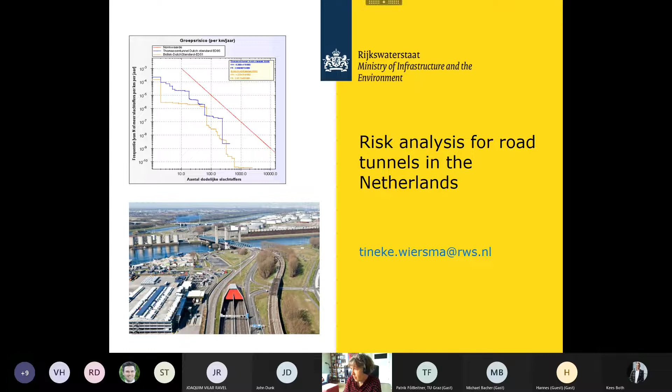Well, in my presentation, I will first explain a bit on how tunnel safety regulation is implemented in our legislation, and how the EU directive is also implemented in our national legislation. Then I will go into the risk analysis methods. Two methods are prescribed in our regulation. And then I will go into more detail into the quantitative risk analysis method. And since this is for PFPNet, I put also a short introduction on how we have fire protective measures in the model and how we can see if it influences the risks. At the end, maybe there will be some time for questions.

I can try to see the chat. No, it's not there. Okay.

Then first to the tunnel legislation in the Netherlands. As you may know, we have this EU directive of 2004 on the minimum safety requirements for tunnels in the Trans-European road network. This EU directive of 2004 was implemented in the Dutch legislation in 2006. Actually it's a bit more strict than even the EU directive, so we apply it to all our tunnels, not only the tunnels in the Trans-European road network. And it's mandatory for all tunnels longer than 250 meters.

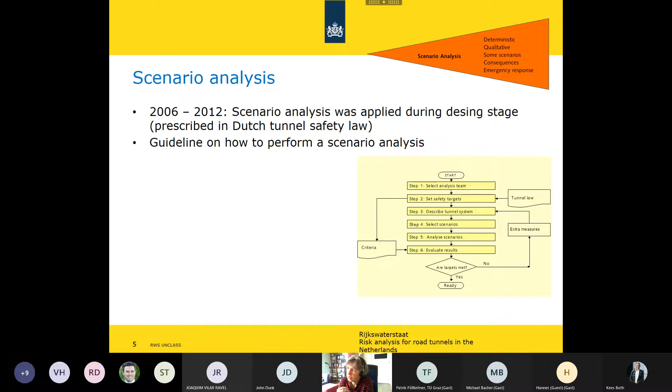So then we walk through the events during a scenario and what the response of the different organizations involved will be. And then at the end, we evaluate if we have all possible measures taken, and if there are, what recommendations we should follow in the preparation of the emergency response.

As I already mentioned, we had a lot of discussion on the acceptability of the risk and additional safety measures in the stage where we also applied it during the design stage. So we changed that, since we didn't have a risk criteria to compare it with, we changed that in the updated tunnel safety law.

And since we already prescribed all the safety measures in this new tunnel safety law, it was no longer useful to have this discussion during the scenario analysis. In the new scenario analysis, the focus is entirely on the preparation of emergency response procedures. So that's how we apply it currently in our new and refurbished tunnels.

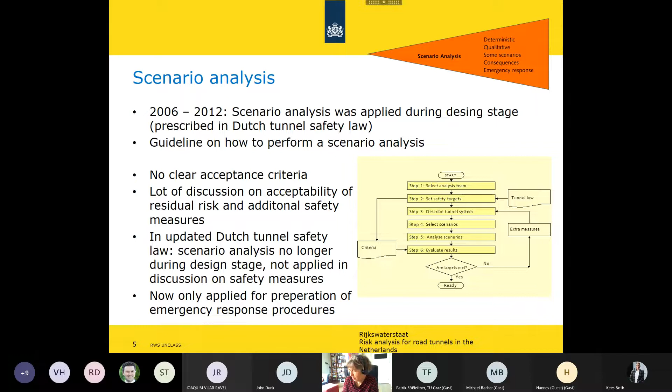The quantitative risk analysis, as contrary to the scenario analysis, analyzes a much larger set of scenarios, and we take into account the probability of these scenarios. We also quantify the consequences. We mainly use it to compare alternatives, and we apply it to see the effect of safety measures. But the main use now is to compare it with our risk criteria, which is also in the safety law.

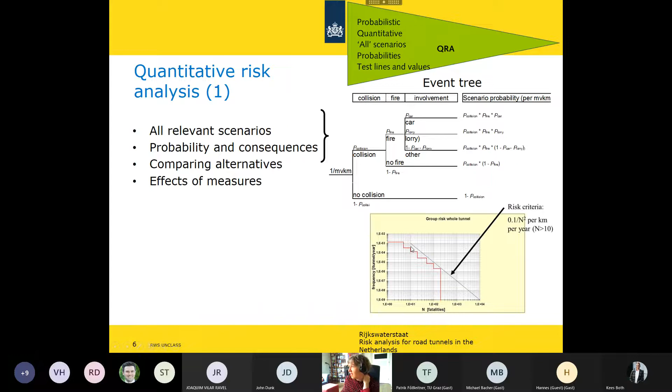So if you see this graph here, this is what we calculate. In this quantitative risk analysis method, we calculate the risk and display it in an FN curve, where we have the number of fatalities compared to the accident frequency, expressed per kilometer of tunnel per year.

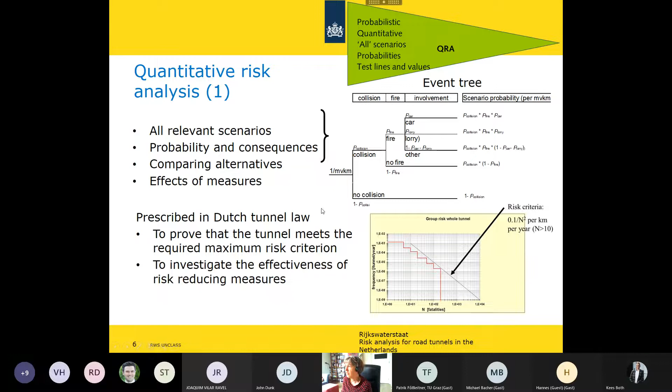This risk criteria is also prescribed in our tunnel safety law. After the calculation, which we have to do for every tunnel tube separately, it has to show that this risk line stays beneath the risk criterion. The model itself is a very large event tree describing all possible events and variations on the event, and the risk is a combination of the number of casualties for each event and the probability of that event.

We had this risk method earlier in 2006, but leading up to the updated tunnel safety regulation in 2012, we developed a dedicated risk model for quantitative risk assessment for road tunnels.

This development took several years, but when it was more or less finished in 2011, we also did a consequence analysis and acceptance tests for all our tunnels to see which tunnels would meet the criteria and which not, and how it compared to other risk models before we implemented it in the tunnel safety law.

We also made a comparison with the PIARC model of DG-QRAM. They are not really completely comparable, but it gives some insight into how they quantify these scenarios and which scenarios they had in the model compared to what we did. I think the RWS model has some more detail on the fire consequences and the influence on equipment.

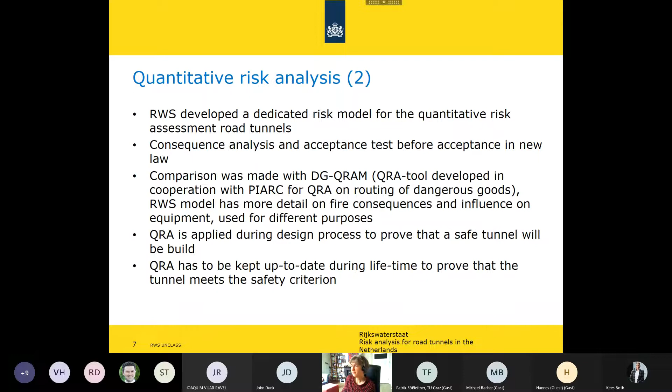The risk is highly influenced by the traffic intensity and the use made by, for instance, dangerous goods, so it can change over time. That's why we have to keep this QRA updated, and if you don't meet this risk criteria, then we have to take alternative measures to reduce the risk.

Well, in the model, the main - I hope you still see my screen, but I can see nothing. So, still okay? Yeah, screen is still good. Okay.

Then the main principles of the model. Of course, it's a model, so we have to simplify reality a bit, so wherever necessary we applied some simplifications. The quantification of the risk is mainly on lethality, so we don't calculate injuries or material damage.

We had some experiments in extending the model also to a material damage model, but since our risk criteria is mainly focused on lethality now, and all the measures on diminishing material damage are prescribed in our law, there's not much demand for a model on material damage, so we don't use that anymore.

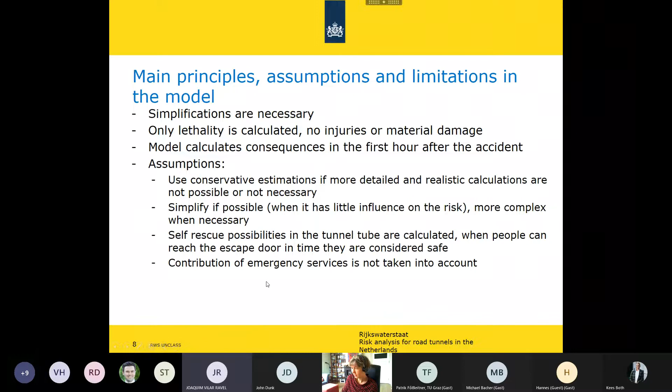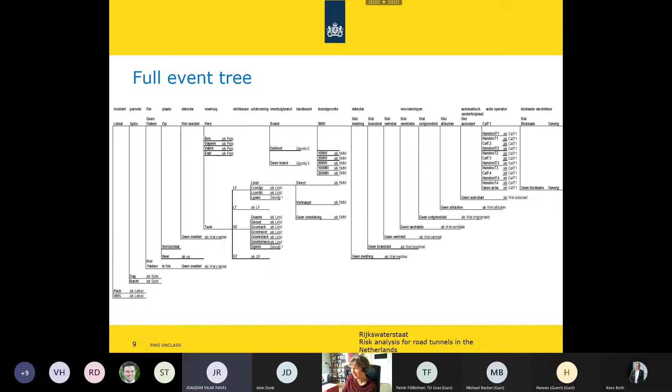First of all, we start with the type of incident, because it can influence the fire growth and the number of cars involved. So we start with: is it a collision or is it a breakdown?

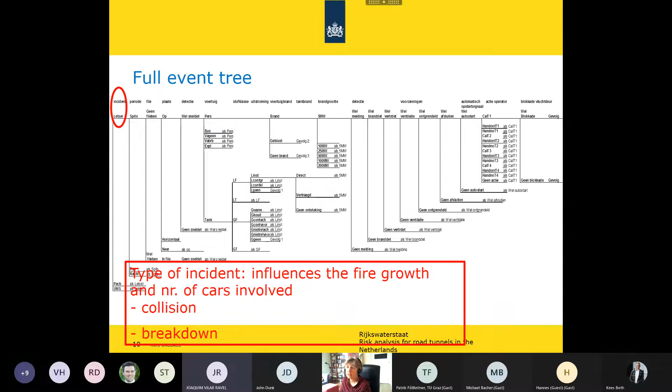Then the time of day is important, because in the evening or night there will not be many cars involved, but during peak hours the tunnel will be filled with cars when there's an accident. So that is incorporated in the model to quantify the consequences.

One important thing is also the number of traffic jams, especially traffic jams downstream of the accident. If we have a traffic jam already in the tunnel and one or more cars hit the tail of the traffic jam, it will influence all people in the tunnel. Since we have longitudinal ventilation in almost all our tunnels, the heat and smoke will go over this downstream traffic jam, so that will have major consequences.

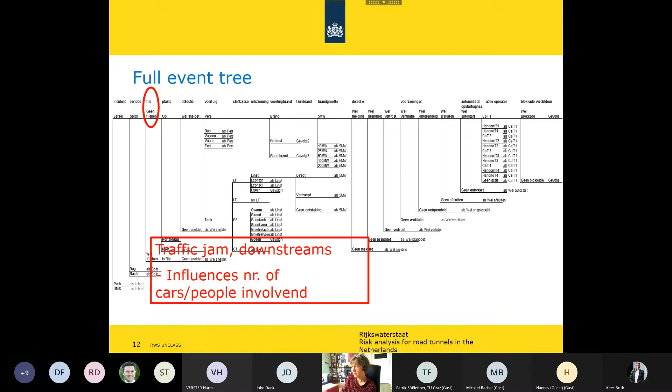In the model we also have the location in the tunnel. We have 3 different locations where we calculate consequences. The slope of the tunnel also influences how the spill of dangerous goods is distributed, so that's why we have 3 places in the model.

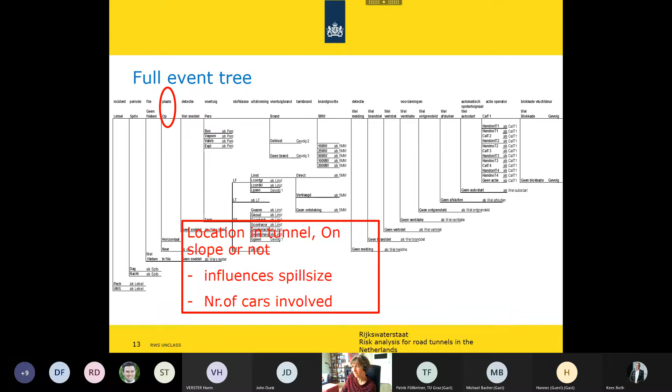We have a lot of detection equipment in most of our tunnels, and early detection can also help influence the consequences. If the operator, which we have in all our tunnels, detects the accident very early, it can start the tunnel equipment immediately, the ventilation and the evacuation, which will have a positive effect on the consequences. So we have fire detection, but we also have speed detection in most of our tunnels, so it's also in our model.

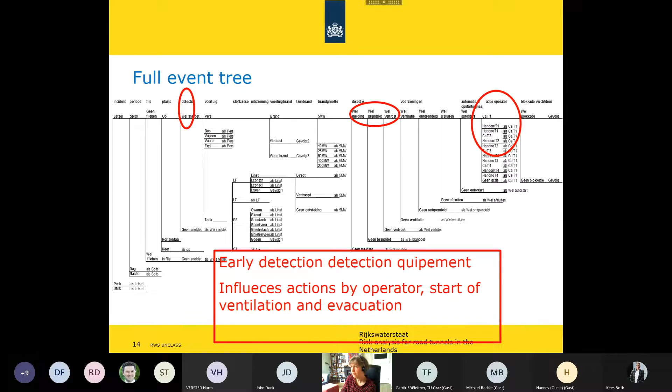The type of cars definitely has some influence on the fire size. We consider several fire sizes ranging from 5 megawatts to 200 megawatts.

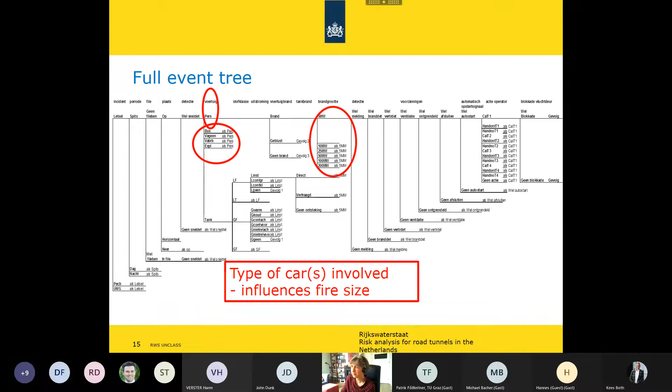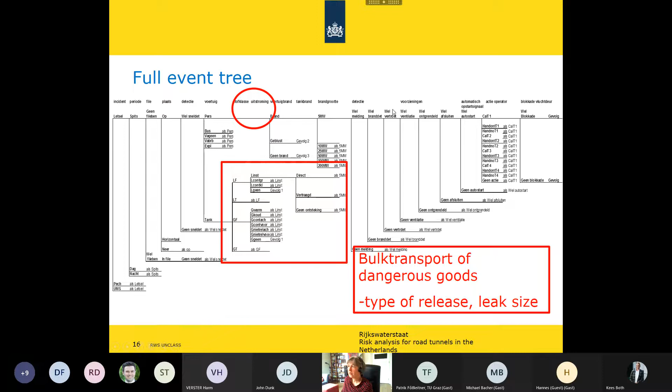A major influence is also the bulk transport of dangerous goods, which is allowed in most of our tunnels. So we have this distinction between flammable liquids, flammable gases, and toxic liquids and gases. Toxic gases and flammable gases are not allowed in all tunnels. They are allowed in our land tunnels, but mostly not allowed in our underwater tunnels, because we think the risk of explosion and the consequences for the tunnel construction are too severe.

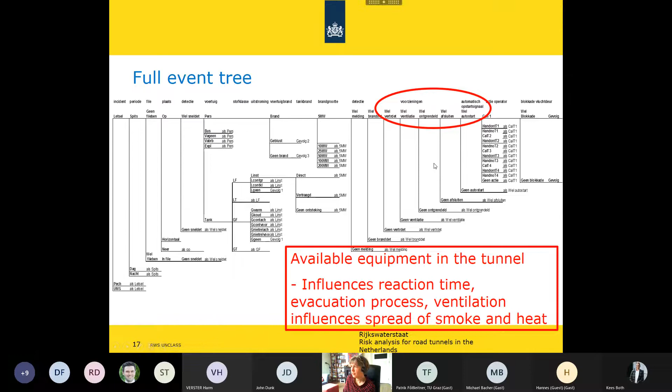We have different equipment in the tunnel and in the model that can influence the consequences, like ventilation, escape doors, and the closure of the tunnel immediately after detection of an accident. In some cases, a fire or an accident can also block the escape doors, which is also included in the model.

So this is a lot of branches in the event tree, and depending on if you have all dangerous goods and all equipment in it, that can mean we have to calculate about 500,000 scenarios.

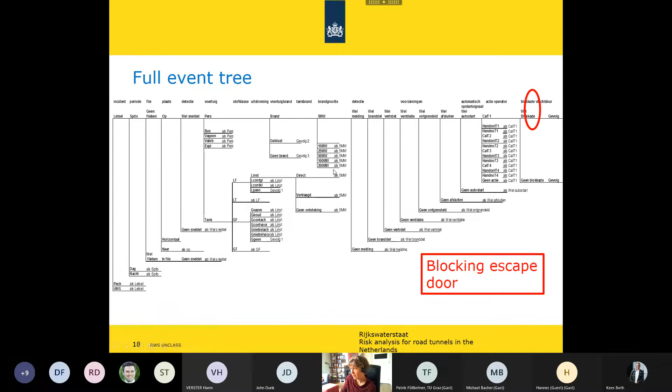That's what the model does, and to do the calculations you have to put some input into the model. We have to give data on the geometry, the length and width of the tunnel for instance, all safety features in the tunnel like ventilation, operation, the operator, the loudspeakers, the distance between escape doors, and the detection possibilities.

Other inputs are the number of occupants, the traffic intensity in the different periods of the day, the traffic composition, and the downstream traffic jams, which also have to be estimated and put into the model.

We start with the incident frequencies. The frequency of collision or breakdown are input parameters, so that's not calculated by the model itself. We do have a smaller model, made in a spreadsheet, to make estimates if you don't have any data on your tunnel for this incident frequency. You can use this model separately to make an estimate for the incident frequencies and then implement it in the QRA model.

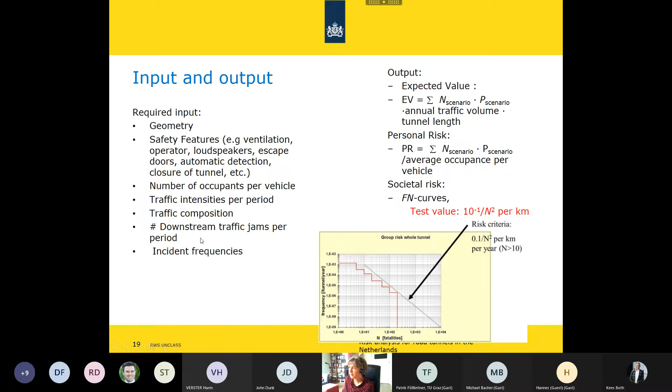Well, we need a lot of data and formulas to fill this model and to make these quantifications. So for the accident and fire frequencies, we did some additional research, and we used data and expert opinions to make these estimates.

We did some research on the frequency of fires in trucks. We are more interested in trucks than passenger cars because the fire size of trucks is more severe and has a higher risk of casualties. So we did research on data in the Netherlands, but also data from European countries, to make an estimate for this fire risk.

This is the result: the fire risk for heavy fires for trucks larger than 25 megawatts is about 1.5 times 10 to the minus 10 per vehicle kilometer. So that's an input that you can put into the model.

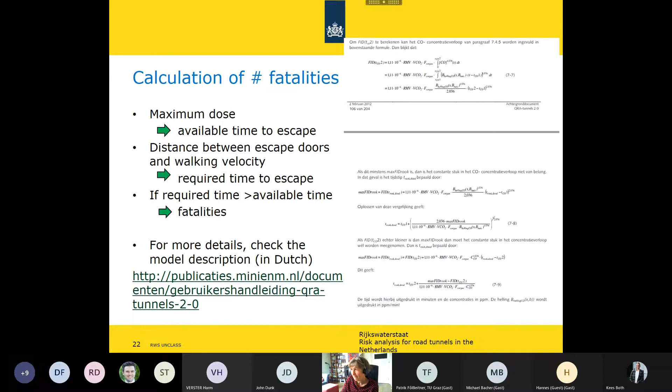So the CFD calculations, we applied them for a standard tunnel with a width of about 13 meters and a height of about 5 meters, a rectangular tunnel. We did calculations for several fires, and to see how the configuration of the tunnel influences the results, we did some sensitivity analysis as well.

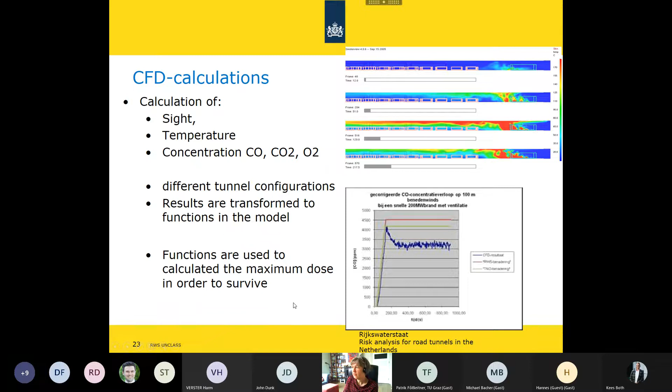In this example, it's the CO concentration at a certain location in the tunnel at a 200 megawatt fire with ventilation. So we made graphs like this for all CFD results and put them as functions into the model, and the functions are then used to calculate the maximum dose in order to survive the consequences of the fire.

So that's a bit more on the consequence modeling so far. Well, what do we do with passive fire protection in the model? If you open the model, you get several sheets where you have to put in all the parameters used to calculate the risk. One of the sheets is about all the equipment in the tunnel, and there you can also fill in if it has passive fire protection.

So we put this parameter in the model, but since we decided not to develop the material damage calculations any further for now, we are not really using this parameter, so it doesn't actually do anything to calculate the risks. When we developed the model, we also did CFD calculations with or without passive fire protection, but the consequences on the number of casualties were not really significant. So we decided not to take this parameter into account when calculating the number of casualties. So for this public, it may be a bit disappointing that we did have this parameter on passive fire protection in the model, but it's not really used.

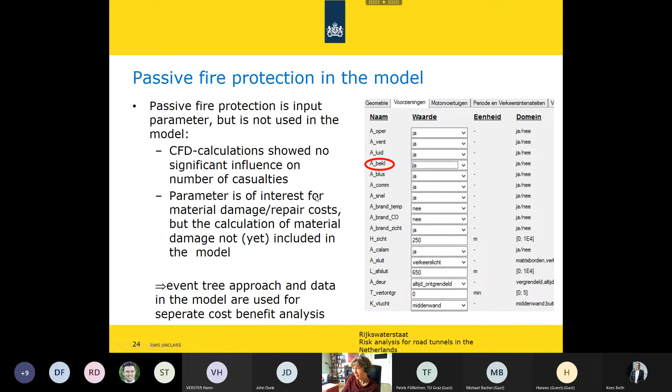We also had a lot of discussion on active fire protection and whether or not to apply it in our tunnels and include it in our standard set of safety measures. It's not a standard parameter in our model - you can't just put in whether we have or don't have active fire protection, because at the time we developed the model, we only had one tunnel with active fire protection and all the others didn't.

But you can do some calculations to see the effectiveness of this system by making changes in the probability of extinguishing the fire. In the model, besides the input values, we also have default values used to calculate the number of casualties, and one of these is the probability of extinguishing the fire and the probability of fire growth. If you want to apply active fire protection in the model, you have to make changes in these default values. For example, we estimate that the probability of extinguishing a passenger car fire is 0.25.

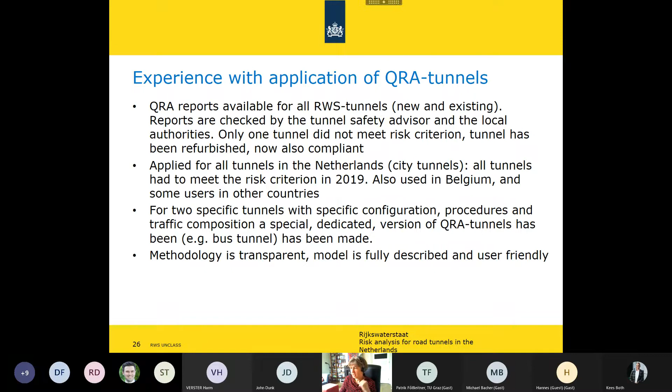For now, the model is still used, but at the moment we are doing extended research on new energy carriers because we want to know if we have to extend the model for new energy carriers like hydrogen cars and buses. I hope by the end of next year we know if and how we have to extend the model for buses and trucks with hydrogen tanks.

I think I already mentioned that we did some research on extending the model with material damage, but we haven't implemented it yet because we have no real need for expanding the model on that part. We use the knowledge from that research for separate cost benefit analysis, but we didn't implement that in the model itself.

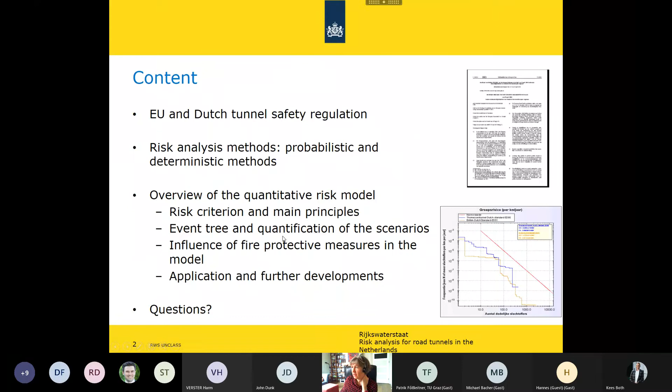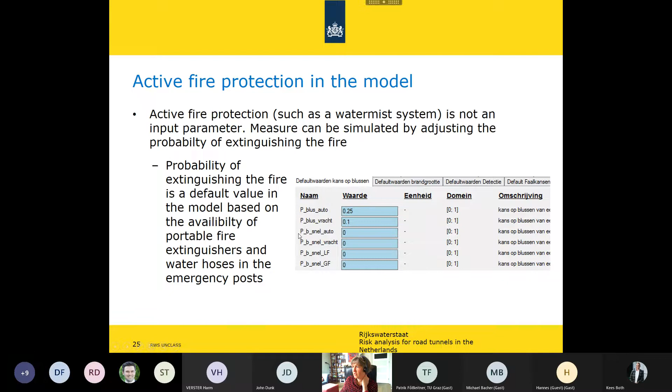So I think—oh, that was a bit too fast. I think we are almost at the end of the slides. I think I ended here. Then yes, so finally, last sheet before the questions.

We apply in the Netherlands a combination of this quantitative risk analysis with the prescriptive approach for all the safety equipment in our tunnels. This combination shows us a very good basis for decision making.

Since the model has been freely available since 2012 and is prescribed in the tunnel safety law, it's also a very generally accepted method now. And since it is standardized, we hardly have any discussion on the methodology anymore. So now we can focus on the tunnel itself and on how to apply all this technical equipment and on the organizational procedures to be taken.

If you are interested in the model itself, it's freely available and you can order it with me or my organization. But we made it for our own use, so it's only in Dutch. The model itself doesn't have that much text, so I think it's not very difficult to use if you don't speak Dutch. But if you want to know all the background, well, all the background material is also in Dutch.

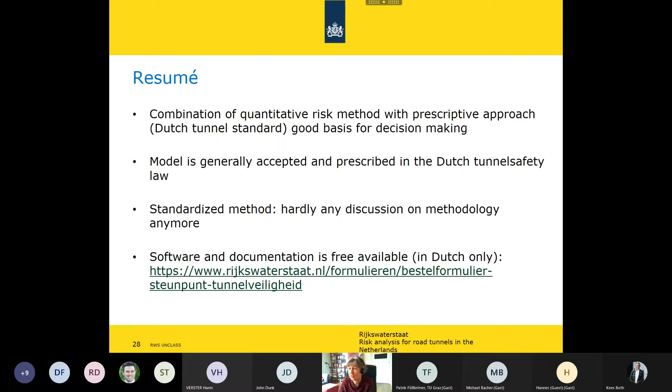So that was the end of my presentation, and I think we still have a little time for questions.

Yes, thank you, Tineke. All clear. Thanks a lot for the comprehensive overview. I think you can talk for a couple of days on this topic. You're the top-notch expert on this model and how it was developed essentially from scratch—from, I think, back in the day it was an Excel first development. Yes, that's correct, with your former colleague Jelle Hoeksma, and this is now a rather advanced model.

So there are some questions in the chat, at least one from Sabu Thomas, and he asks about EV cars, or probably this extends to any other vehicles with conventional engines, but electrically propelled vehicles or any other hydrogen-fueled cars—have they been of influence in the development of your model, and how are you taking this into account for future releases of your model?